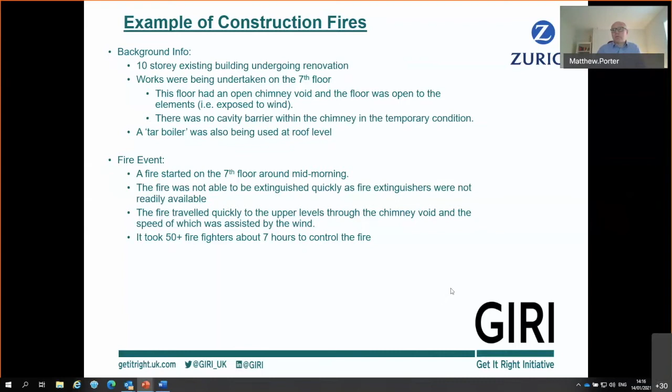So areas of concern from a risk management perspective: the project didn't have a hot work permit system in place. The project didn't produce an overall project fire risk management plan for the construction phase. Plans were produced midway through the project and by individual subcontractors, but there was a quite clear lack of coordination between the parties involved. There was a lack of temporary fire barriers for voids connecting different floors.

There was a lack of barriers / shields in place to prevent any wind spreading sparks and embers and effectively exacerbating a fire event. Although not responsible for this fire, as we've already touched upon, the presence of a tar boiler on the roof and the use of the same is a bit of a concern. From an insurance insight perspective, this was a £20 million loss, ultimately settled at £12 million.

From a policy point of view, the first issue was the actual value of contract works completed at the time of the fire. This is a perennial issue where you have, even if it's just contract works, but I think in this particular example, there were existing structures, retained structures in place. So it was a refurbishment of an existing building, and there will always need to be that delineation between what is construction all risks and what is covered under the property cover.

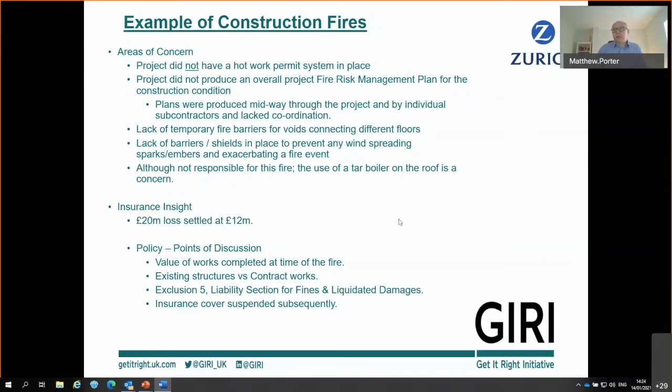Okay, so the next slide. This is example number 2. This is an existing 5-storey listed building. Again, there'll be retained structures there, being partially extended and also refurbished. The building was to remain operational during the works.

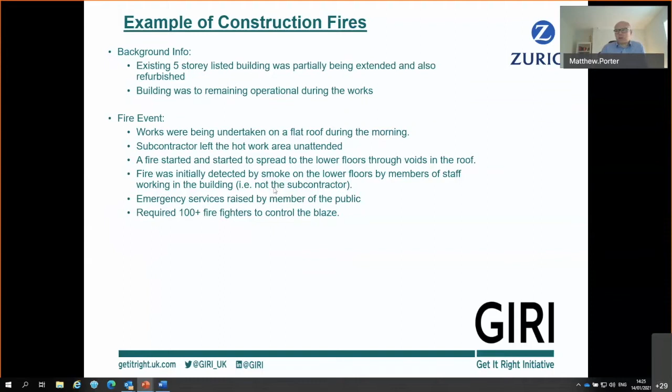The fire event itself occurred when works were being undertaken on a flat roof during the morning, and the subcontractor left the work area unattended. The fire started to spread to the lower floors through voids in the roof. The fire was initially detected by smoke on the lower floors and by members of staff working in the building, i.e. not the subcontractor themselves. Emergency services were contacted by a member of the public who saw smoke exiting the building from street level. This required the attendance of 100+ firefighters to control the blaze, quite a serious fire.

So the areas of concern from a risk management perspective for us were that the project did have a hot work permit system. However, there was an inadequate fire watch. Clearly, the subcontractor had undertaken some work and then left the area. They weren't watching for any signs of fire or ignition. And the fire alert itself, as we said, wasn't raised by the subcontractor, but by members of the public and staff members in the building.

There were inadequate fire protection measures between the existing and the new building, resulting in fire spreading into the new extension part of the building. And temporary fire screens separating the two buildings had been destroyed or removed, not quite sure which. From an insurance insight perspective, it was a 6.75 million loss, recently settled at about 4.7 million.

From a policy perspective, some interesting points arose here. There was no existing structures cover on this particular project. So any damage to existing structures or property would be picked up by the property insurer. So you've already got a complication to some extent of interacting with two insurers.

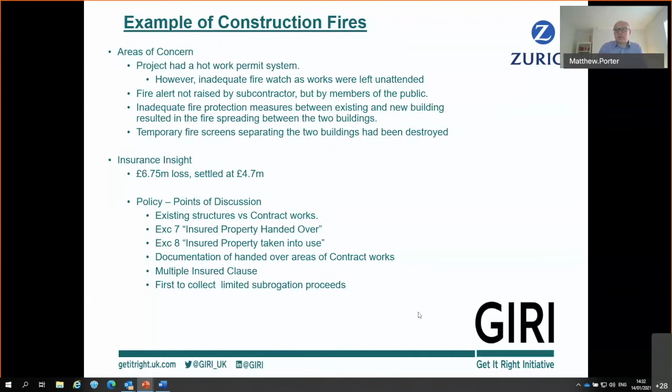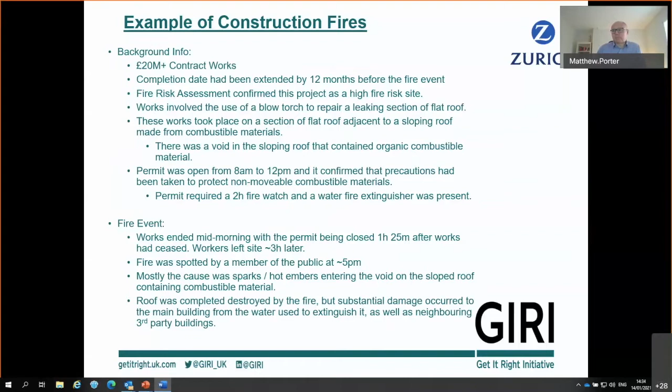So areas of concern from a risk management perspective: adjacent combustible materials were not adequately protected. There were empty cigarette packets found on the roof, suggesting that it was maybe an unofficial smoking area. Foam and CO2 fire extinguishers were provided. One was overdue a service by several months and partially discharged already, and no water extinguisher was provided as required.

No additional fire watch was undertaken at the end of the working day, as really should have been expected on such a high-risk site. The insurance insight: the loss was stated at around about £3 million. We didn't pay anything on this particular claim. And from an insurance policy discussion perspective,

so the first point is difference in conditions cover. So this again ties back to the whole contractual arrangements about insurance and who's responsible for procuring it. In this particular example, the employer had to procure a project cover. So the contractor that we were insuring were covered under that. They had the contractual rights to that insurance, but the claim they presented to our policy was on the basis of a difference in conditions cover.

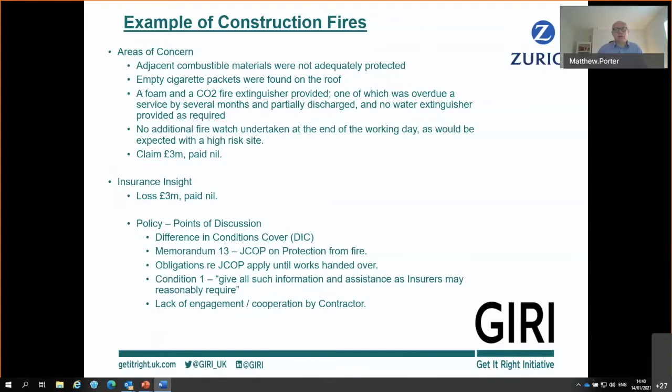Ultimately, with the issues that had been experienced by the contractor on this loss, the claim against our policy was withdrawn. So hence why we paid nothing on this particular loss. Okay, I think that brings me to the end of the fire examples insurance insight. So I believe Rob's going to take you through the remainder of the slides.

Just going to do that. I'm just going to get my presenter up.

Okay, so just a little bit of interaction here. So just a quick question to the audience: do you think at present, and you can put your answers in the chat function, that we do enough to prevent construction fires? So I'd be interested to see what people's thoughts are on that. So whether you think we do enough at the moment and don't need to do any more, or whether we could improve things. So just let me know, that would be great.

Okay, so we've got two answers. Generally, what we find is that the construction industry has made some improvements, and obviously that's been related to improving fire safety, life safety from a health and safety point of view. But we think a lot more could be done, particularly focusing on property protection, and not just focusing on lives. I think if you actually go with the intent of protecting your property, life safety will follow suit as well.

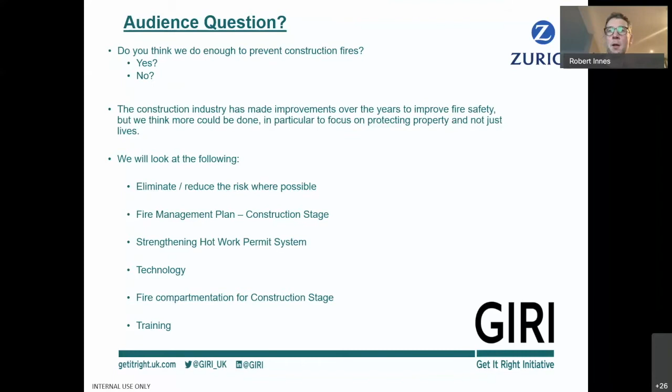So just to reiterate what Matt said, particularly with the last loss in mind, it is really important that you comply with the joint code of practice. It's not just a best practice document that if you can follow it, you should. You have to, because if you don't, there is a risk that you won't get insurance coverage. And as Matt's reiterated, it's not just complying with it. You might have to show evidence that you have complied with this in the event of a fire.

So in that last loss, they were asked to show how they protected their materials, how they did their fire watches, and provide actual evidence. So it's something that's really important to bear in mind. I think the first port of call for reducing the risk of hot work fires is to try and eliminate the risk at source. So we should be asking ourselves, do we need to be doing this? Is there an alternative method such as cold working?

And on the last loss that Matt referenced, they were asked that question: what did you do to eliminate that risk? Did you actually investigate alternative methods? So that's something we should be looking at, demonstrating and evidencing where you can. There are some hot work activities that need to take place, but it's giving some thought as to, can we do this offsite? Can we prefabricate? If we have to do it on site, can we do it outside of the building? It's reducing the hot work activities in a building to the absolute minimum and really giving it some thought.

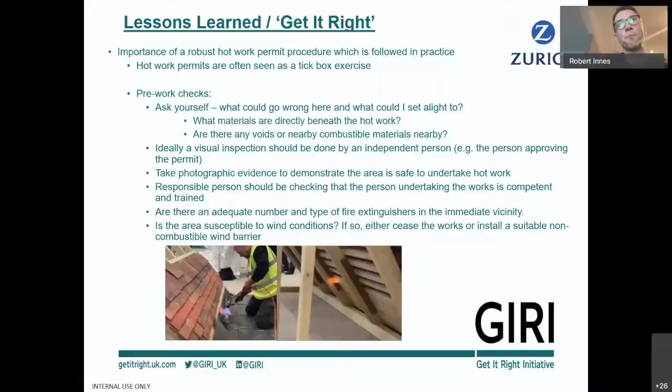During the works, you should never leave them unattended. And one area that we focus on when we chat to contractors is what you do during breaks, because we often find that hot work permits are open all day, but no one really gives much thought to what happens when people go on lunch.

What we ask is to ensure that there's always someone there responsible for carrying out the work, so it's never left unattended. But if you do have to go for a lunch break and you're doing the hot work, someone is left there who's competent, who's doing a fire watch, and is dedicated solely to that task. So they aren't in the room looking at something else; they're physically responsible for doing the fire watch.

So while that person has their break, we're confident that no fire can really start during that period, or if it does start, someone can react immediately. And we've had an example of where that wasn't done. Or if you do have to take a break and that option's not available, so you have to leave the works unattended, then we would really recommend that the permit isn't open all day. It's limited to the duration of the works while you're there, and you do a fire watch at the end of that period before you take your break.

And then post-work checks. One thing we come across is, again, the fire watches. I think some people think this is just a 60-minute or 30-minute or 2-hour check where you come back to the site after that period to check everything's okay. Well, actually, this fire watch should be continuous, at least for the first 60 minutes if you've got a 60-minute fire watch. Obviously we don't want the fire to start shortly after you leave and then come back in an hour to find that there's a fire.

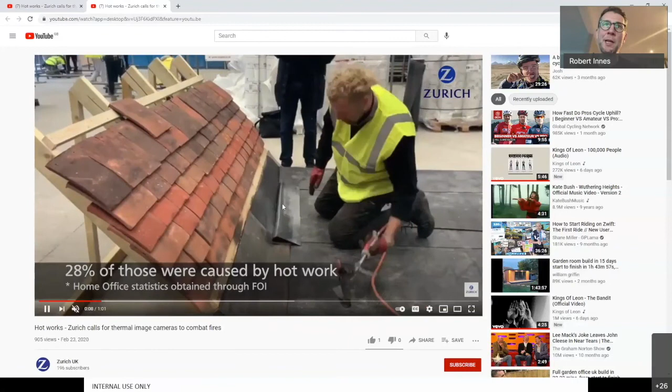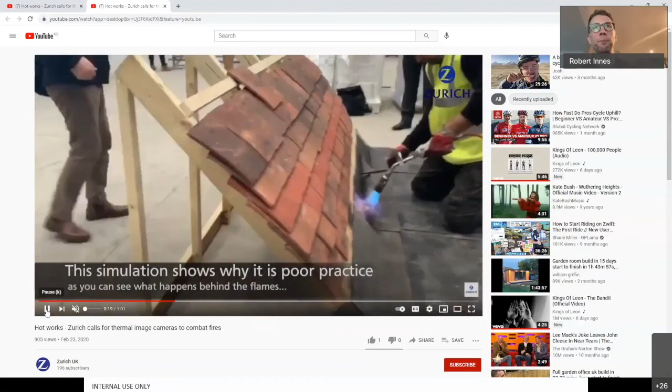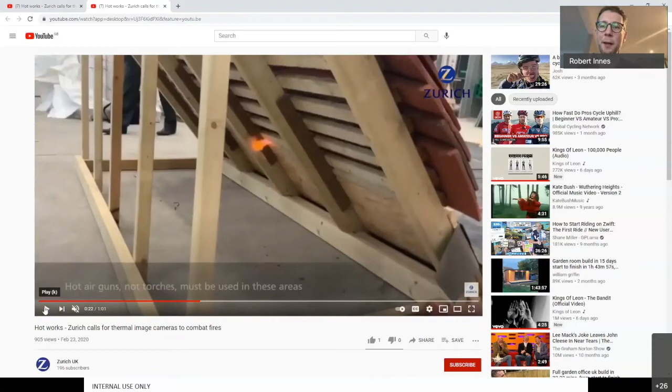So that's just reiterating some of the facts we stated at the start. And you'll see here that someone's using a blowtorch to do some hot work on a roof. I'll just pause that here. You can see the flame coming through the materials that are used, and obviously there's combustible material behind there. It really explains why checking your substrate is really important.

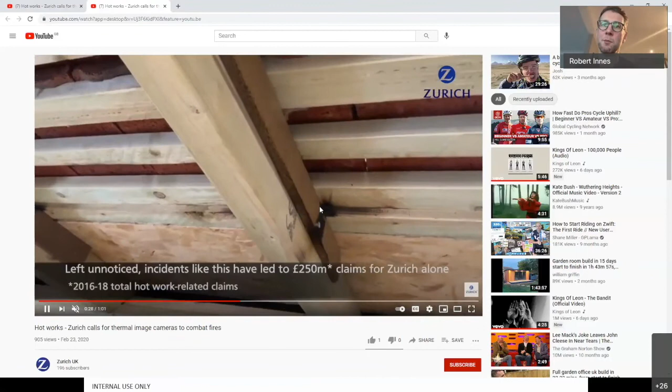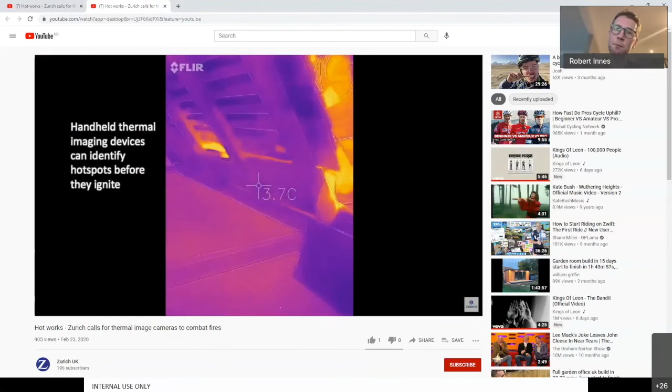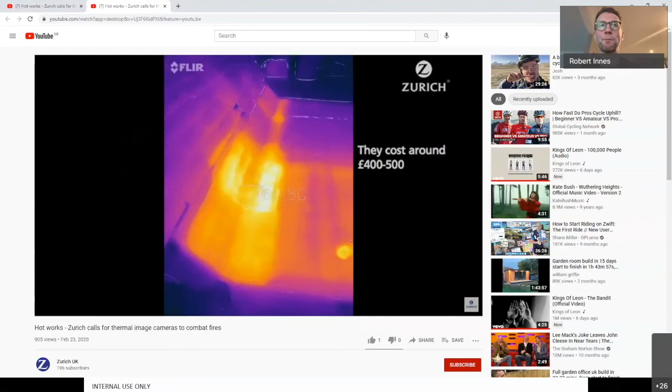This will zoom in a little bit, and then you'll start seeing a small fire starting, and that's all it takes. Just that 5-minute activity could cause a significant fire. So something that we are looking at in Zurich and trying to promote is the use of thermal imaging cameras. I'll touch on this in a second, but these can help reduce that risk, particularly in areas where it's not as easy to see whether a fire has started. Okay, so I'll just go back to the presentation.

Okay, so hopefully everyone can see that. So looking at technology, we just showed you thermal imaging cameras. That's something I'm seeing more and more of when I go and see construction sites. Contractors are using these as part of the fire watch process, so that's something we would encourage. It's not something I would say should replace your fire watch, but it's an additional tool that you could use, to help identify potential areas of fire where you might not be able to see it with your naked eye.

So any sort of voids that aren't easy to see, that might be dark, that you can't see into, a thermal imaging camera would be perfect for that. I would just like to caveat that thermal imaging cameras do have limitations, and it's really important to understand those. But it's quite a useful tool to use in addition to your current practices, not to replace them.

And these can produce images that you can append to your hot work permit to demonstrate that you did carry out a fire watch. This is something that I'm seeing contractors use more and more, so if you want any feedback on that, feel free to get in contact. And something else we're looking at in Zurich, just piloting at the moment, is the use of smart permits. So it's using an electronic hot work permit rather than a paper-based one.